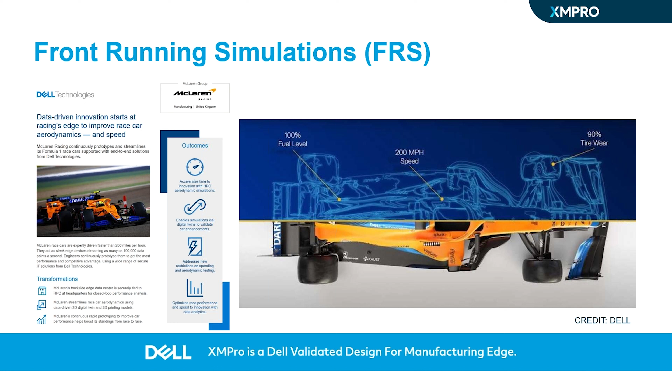And a great example of front-running simulation is what happens in Formula One car racing. XMPro is a partner with Dell. This is not built on XMPro, but this is work that Dell has done with McLaren around front-running simulation. So this is one of the fastest edge devices out there. It goes at 200 miles an hour or 320 kilometers per hour, and at that, it generates about 100,000 data points per second. So a lot of information that you can put together, and based on that, determine fuel strategies and a whole bunch of other things during race time. So the ability to take the data, run it faster than real time, and then decide on certain actions. So this is the McLaren example.

There's also great work done by Amazon AWS and others on similar things. So things like, again, taking information on the vehicles, taking track information, combining all of that. You can create multiple use cases, and I think that's one of the other elements of digital twins that's not often understood. It's not about one application or use case that I'm trying to do. I can now take that data and actually facilitate a number of different things.

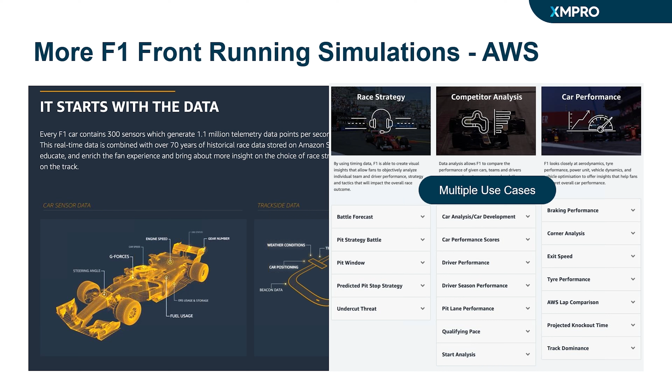So multiple use cases, in this instance, a battle forecast, pit strategies, driver performance, tire performance, exit speeds, a whole bunch of different front-running simulations that I can do. And a specific interesting one is undercut threat. So great video on the AWS website as well.

But with undercut threat, it's actually deciding when to bring your car in, and also looking at what your competitors are potentially doing. So are they looking at undercutting you by bringing in a race car at a certain window of opportunity? Now, in order to do that, you need to measure the real-time speed of all your other competitors, look at their tire wear by using computer vision and a whole bunch of things, try to figure out what their fuel consumption is, take all of that and run it in your strategy.

So these are very sophisticated and advanced examples of front-running simulation, but we're starting to see that move into the industrial space and other areas. So from a digital twin perspective, how we make decisions is changing. As you saw in those very sophisticated examples, we can bring a whole lot of information from multiple different places. And that's really the essence of decision intelligence, where we've got external information, we've got internal information.

And traditionally, what we've done with the more static or conventional digital twins is really decision support. So there's a business process, there's a human in that loop, and we are trying to give them some decision support. Traditionally, it's been dashboards, some business intelligence, condition monitoring, basic predictions as well. So again, the domain of decision support.

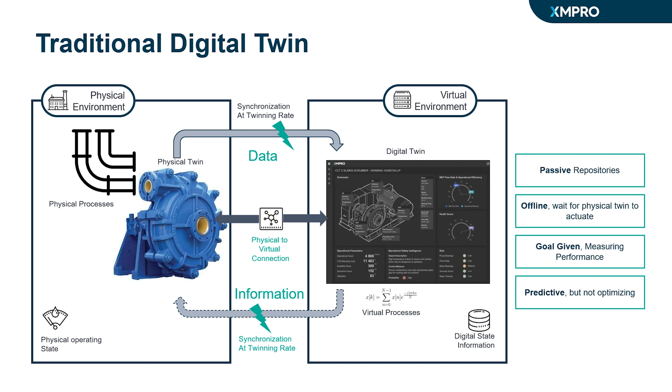It's offline in the sense that it's waiting for the thing on the left-hand side, the physical twin, something to happen, and that will then update. And it's goal given. So I put KPIs and things that I'm trying to measure. And yeah, we can predict, but it's not focused on optimization.

Going forward with intelligent digital twins, we see that decision intelligence structure that I showed a little bit earlier make its way into kind of operating on the side. So we've got expert knowledge, business rules, all the math and physics models that we have, and quite a few of those are already being used in the more decision support type digital twins that we have.

We're now starting to see what is regarded as conventional AI, so regression models and all of those, but then also the new generative AI that we've seen lately, and large language models that are making their way in, and some of the more sophisticated techniques like deep learning neural networks. So that intelligence making its way into digital twins, and then providing the opportunity to make it goal seeking and learning and doing these front running simulations.

Now the question that we get is, how do we make this happen? How do we do this? Because in order to do this, we need that intelligence that runs on the side almost. And where in the previous one we had information at the bottom there, we now have prescriptions that are synchronized at a different rate. So it's not just information we're sending back, we actually send a prescription in terms of what to do back.

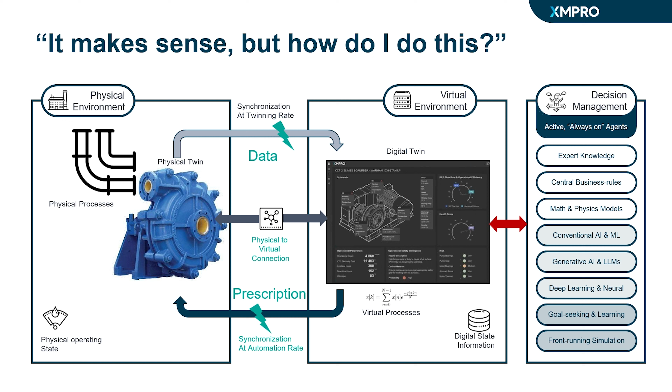Now this could be augmented or potentially automated as well, but we have to have this mechanism on the side that continuously runs. So now going from data, this requires a data flow where it continuously runs on the side and interacts with that. So in order to do this, we came up with a framework.

As organizations are considering, how do we move to intelligent digital twins? Well, first of all, it needs to be integrated, and it needs to be based on standards, models, and have that bi-directional integration that I mentioned. It needs to have intelligence, and we'll go into each of these in a little bit more detail, but it needs to be executable. So it needs to be able to run in real time.

We need some way to make it innovative and for experimentation and doing those simulations. But we also need to provide an environment where we can bring in the help from the digital twin side and augment so that we can learn from that. And lastly, we need to make it interactive. So this is about the visualization. So how do we provide recommendations? How do we make it in a generative multi-experience user interface?

Because all of this is becoming the foundation for the industrial metaverse, whatever the metaverse looks like when it comes out. In order to do this at scale, we also need to do this on a composable kind of framework where we can reuse components, almost like the Lego blocks that kids build toys with. You can actually reuse components and have a pluggable, composable approach for this.

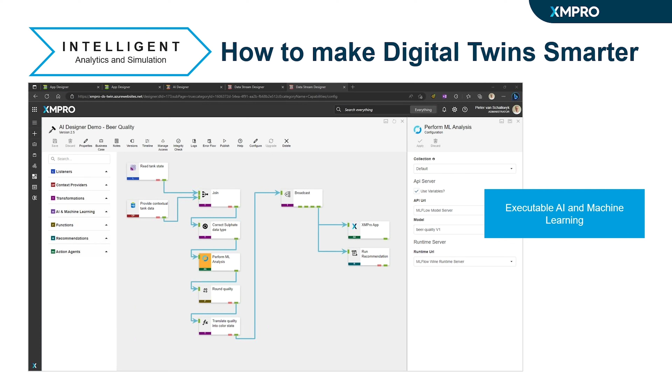The next part is to be able to bring in an environment where we can make it more innovative. So we've embedded Jupyter notebooks, but we've added some functionality to that. So you can wire it up into our data streams, but you can also integrate it with things like ChatGPT and others to help you in the process. So again, aimed at, on the one hand, analyzing the data, but also building models for things like front-running simulations and some of the others.

If we have time, I'll briefly jump into showing you what that is towards the end. In actual fact, let me quickly do that. So this is the Jupyter notebook with the embedded ChatGPT. So if I just briefly step through that, I'll just do that quickly. So I can run through this. It'll generate data for me.

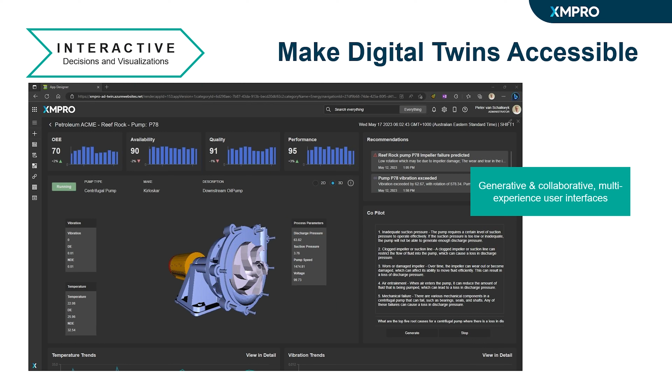In terms of creating a collaborative environment, as the previous example which I briefly showed you, you can create very collaborative environments and user experiences where you now bring that intelligence into a front end that users can use. And as I mentioned, going forward, this will form the foundation of the industrial metaverse.

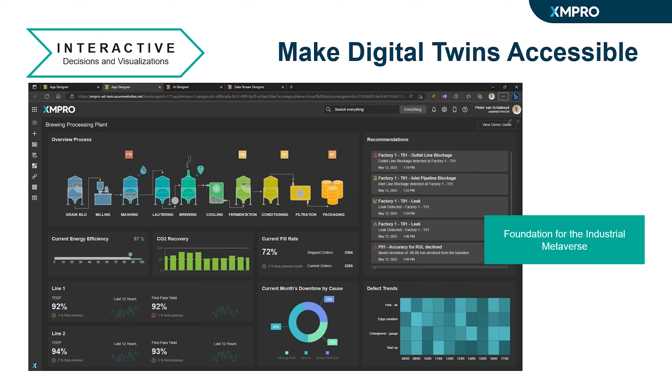Now, the brewing example that you see here is actually an example that we built out for the Dell validated solution for the manufacturing edge side of things. But this is what we see going forward in terms of creating a metaverse in a very interactive environment where, and it doesn't matter what your user experience is, whether it's AR, VR, desktops, mobiles, the intelligence is portable across all of those environments.

Lastly, on the composable side, we came up with positioning XMPro as that composable platform, bringing in data from all the underlying systems to be able to build out those various different use cases. And for that, we have a whole bunch of modules that support that. So in order to do that, the basis for all of that is